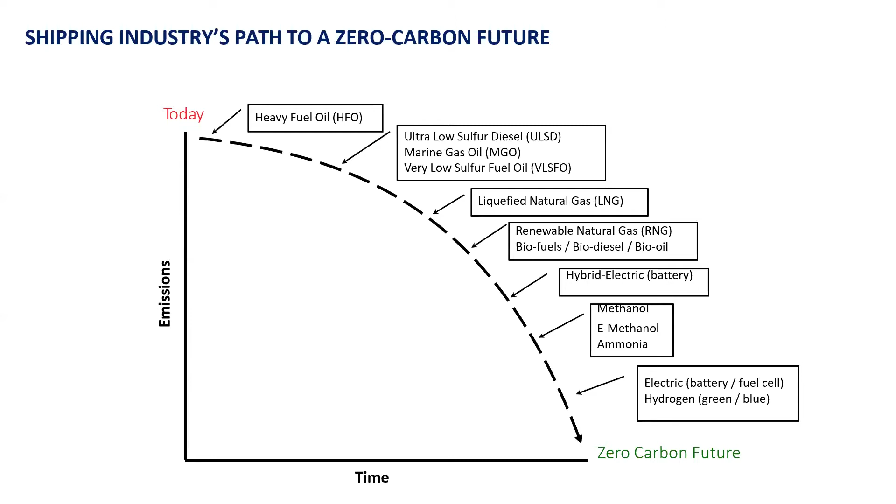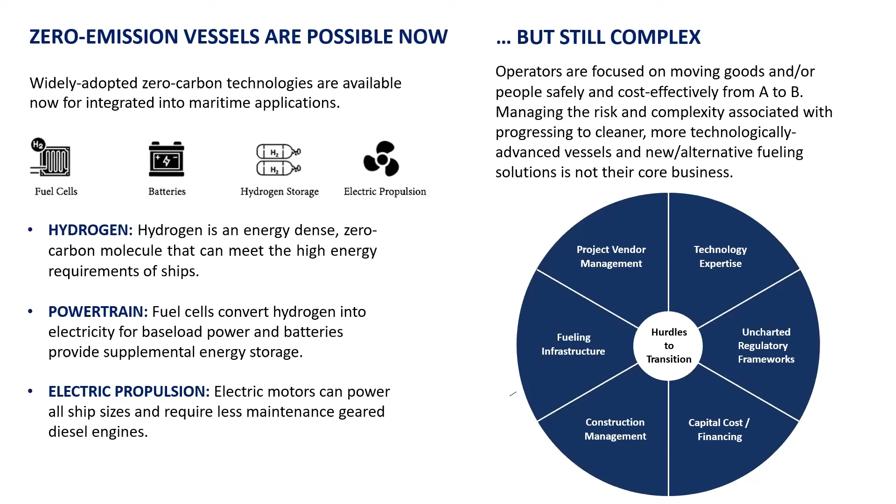So one of the big points that I want to drive home today is that zero emissions vessels are possible now. The technology does exist. What we're doing is integrating these available and widely distributed zero carbon technologies into maritime applications. So the Sea Change, which is the ferry that I'll introduce in a second, is just a first-of-its-kind application of this zero carbon technology. And so while the technology does exist, the challenge that we face is that there is a fair amount of complexity and risk associated right now with making that transition. And Switch's objective is to help the industry by making that transition easier and shouldering some of that complexity. Next slide, please.

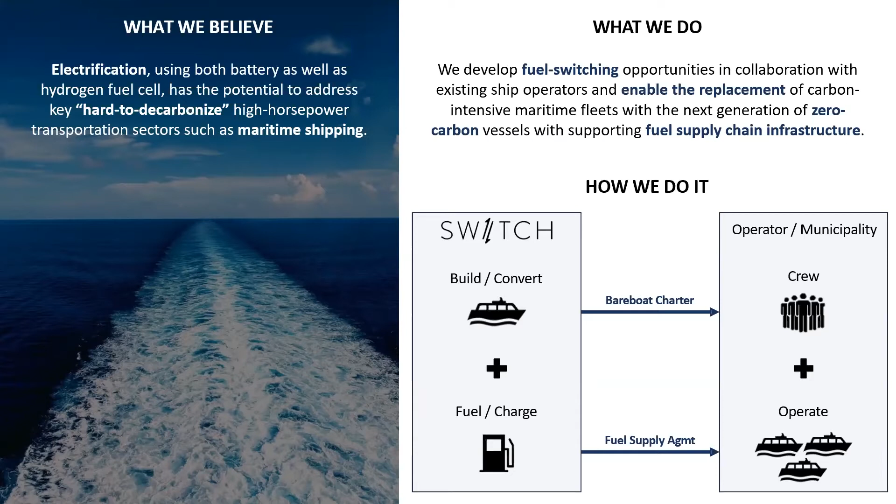So we believe electrification using both battery as well as fuel cell has potential to address the hard to decarbonize high horsepower sectors such as maritime shipping. And really what Switch is looking to do is both create the zero emissions vessels and then also support those with the clean supply infrastructure, and then make those assets, the zero carbon vessels, available to existing operators and municipalities in an efficient way. So that's through simple lease structures like a bareboat charter. Yeah, and with that, I'll go to the next slide. Next slide.

Great. As Madeline mentioned, the first that we are working on is the Sea Change, our vessel. It's a 70-foot passenger ferry powered by hydrogen fuel cell and battery. The Sea Change has 246 kilograms of hydrogen storage on board, 360 kilowatts of fuel cells, a 100 kilowatt hour lithium ion battery, and those electrons are sent to 300 kilowatt electric motors.

And so again, the architecture of the propulsion system in the Sea Change really isn't all that different from some of the predecessors that were hybrids, such as on the West Coast and then smaller vessels on the East Coast. What we're doing is taking out the diesel generators, replacing those with fuel cells. We have our zero carbon architecture. Next slide, please.

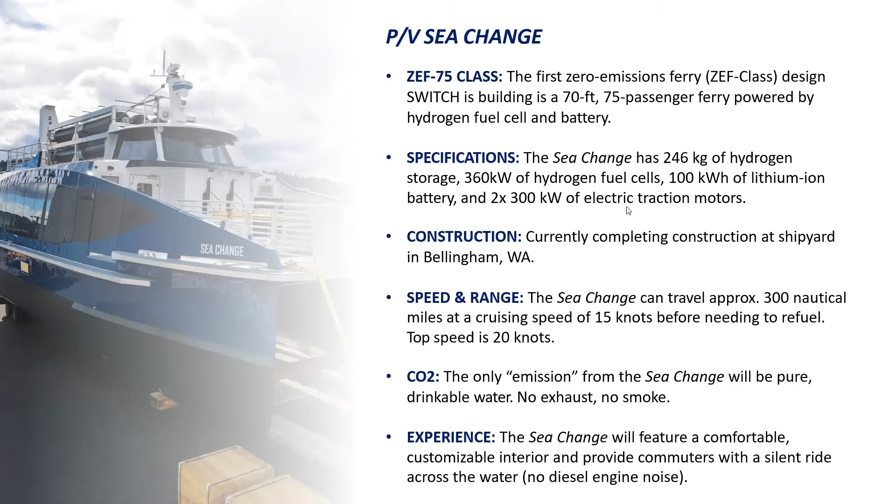Great. So also, these are some pictures. We launched the Sea Change on August 12th, which was a very exciting milestone for us. It's underway for now, and we're getting to the final stages and are at the finish line to be up in San Francisco. This is just a picture of the vessel on the water. Next, please. Great. A bit of the construction timeline here of the Sea Change. Go to the next slide.

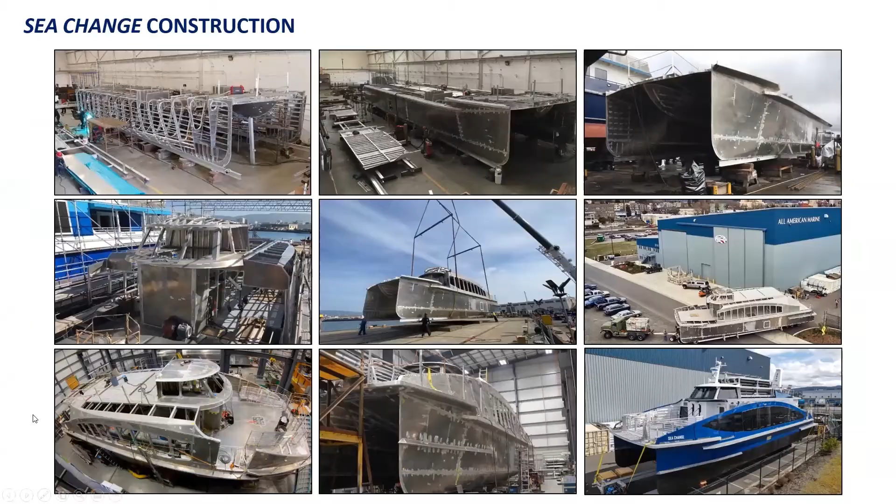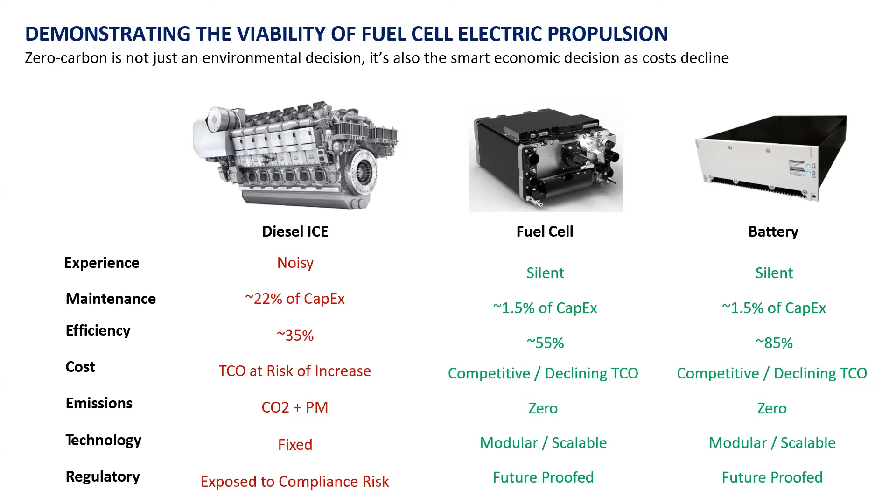This just real briefly shows Switch's position that zero carbon is not just an environmental decision, but it's also an economic one. And as you heard in the beginning, there are regulations coming down the road soon that make these future-proof solutions something that is, first of all, required, and minimizes or completely eliminates exposure to compliance risk. So we see that as one of the big drivers. From a pure technology standpoint, these technologies are in many ways more attractive than your conventional internal combustion engines. Next slide, please.

Great, and then I'll just run real quick through the hydrogen fuel supply chain. You can't have an electric car without an electric charging station, and nor can you have a clean fueled vessel without the supporting infrastructure to fuel that vessel. And so Switch is working with a partner company of ours, West Coast Clean Fuels, that will manage the fuel delivery for sea trials up in Bellingham and then also down in the San Francisco Bay Area.

And West Coast Clean Fuels will manage the permitting with the US Coast Guard, the fire department, the city, and all local municipal entities that are required in that permitting to develop the fuel supply chain. And so this is leveraging experience that West Coast Clean Fuels has in the LNG space. Currently, West Coast Clean Fuels is also managing the US Coast Guard process and developing the fuel supply chain for Pasha Hawaii's container ships that are going to be fueling out of the port of LA Long Beach, and they will be the first LNG fueled container ships on the West Coast. Next slide.

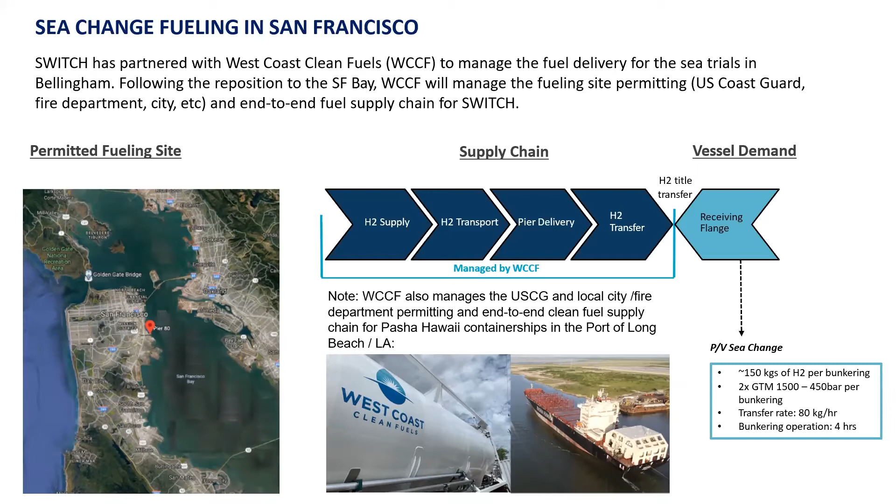Great, and then this just shows a bit of the detail on how the Sea Change will be fueled. It's going to be a cascade fill going from compressed hydrogen in the trucks over to the compressed hydrogen tanks on our ferry.

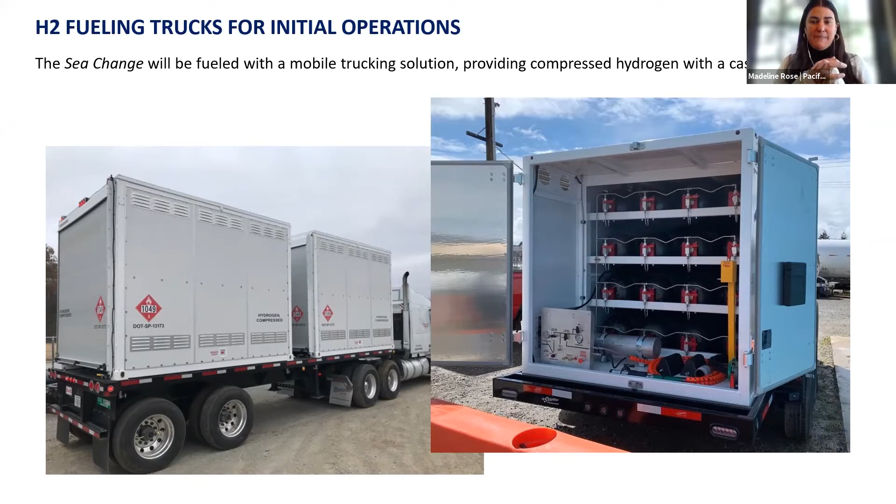So keeping us on the theme of ferries, our next speaker is going to be Graham Balk, the managing broker from Green Yachts. Graham has been working at the intersection of business, boating, and environment throughout his entire career, and that's part of the reason why he helped start Green Yachts. As the managing broker at Green Yachts, he oversees recreational and commercial sales, business operations, strategic partnerships, and boat builder relationships. And Green Yachts has signed agreements with over a quarter of the short-run California passenger ferries that are going to be required to go electric this decade. So it's certainly right on the front line of figuring out this propulsion system for many additional passenger ferries in California. So Graham, thank you for being here, and over to you.

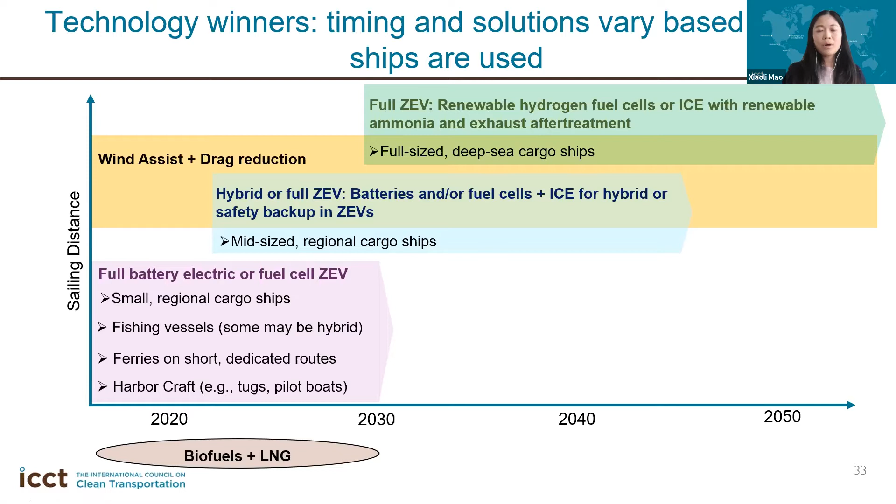So we all know that the battery, compared with the fossil-based fuels, has very, very low energy density. So that makes the reduced range of using batteries a huge challenge for longer range applications. But how limited? We actually used the real world ship operations data in 2019 to model a set of theoretical ranges for different ship types using the battery electric technology.

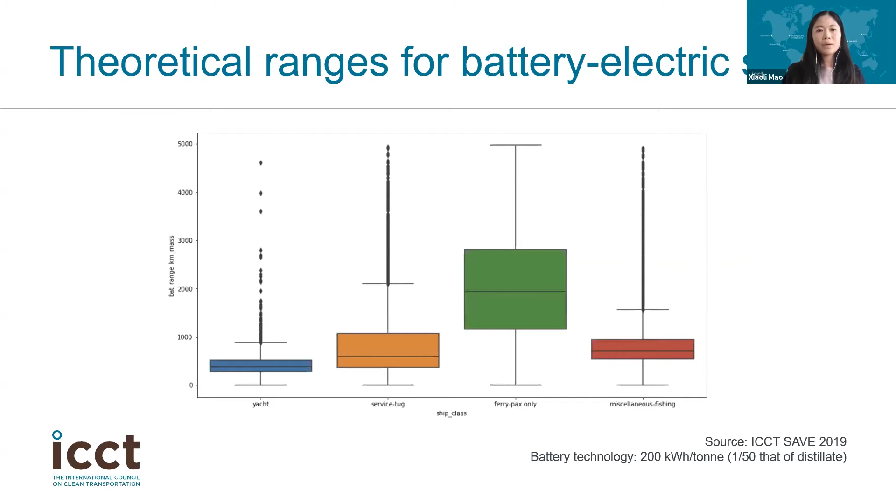Next slide, please. So recently we have been doing some studies focusing primarily on the larger fishing fleet that are active in the Dutch Harbor region, because we know it's a very active fishing port. We analyzed the feasibility of using battery electric technologies to repower these ships. And we found that the attainment rate, which is defined as the share of voyages that these ships can make using battery electric technologies compared with the total number of voyages that they're supposed to make, the overall attainment rate is actually promising from our point of view.

These vessels are relatively large. They engage in relatively longer average trip lengths. And although the trawler subsegment among these vessels shows a relatively lower attainment rate, which is due to huge energy consumption during their active fishing activities, the overall attainment rate is actually not too bad. I should mention that these are also using the relatively conservative battery technology assumptions.

And we also actually modeled the feasibility of using hydrogen fuel cells on these very same ships, and it's showing across the board a very high attainment rate, which is, I believe, over 95%. Next slide, please.

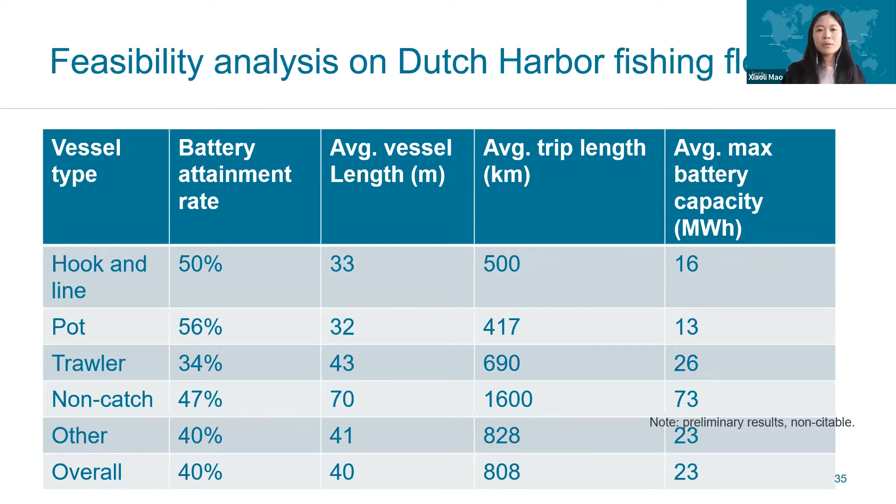We found that the trip length, which is how long the ship has to go out on a single trip between refueling, between the berths at the port, is the determinant factor for attainability. So shorter trip lengths for relatively larger vessels are more able to attain using this technology than the others. Next slide, please.

We also identified some ways to improve the attainment rate. In the short term, you can definitely implement some energy saving practices, including speed reduction. And there is growing interest in utilizing diesel battery hybrid solutions, which are shown to be fuel saving, if not considering other benefits. In the longer term, though, we can rely on battery technology improvement for sure. And the other hybrid option, battery hydrogen, is actually looking more promising.

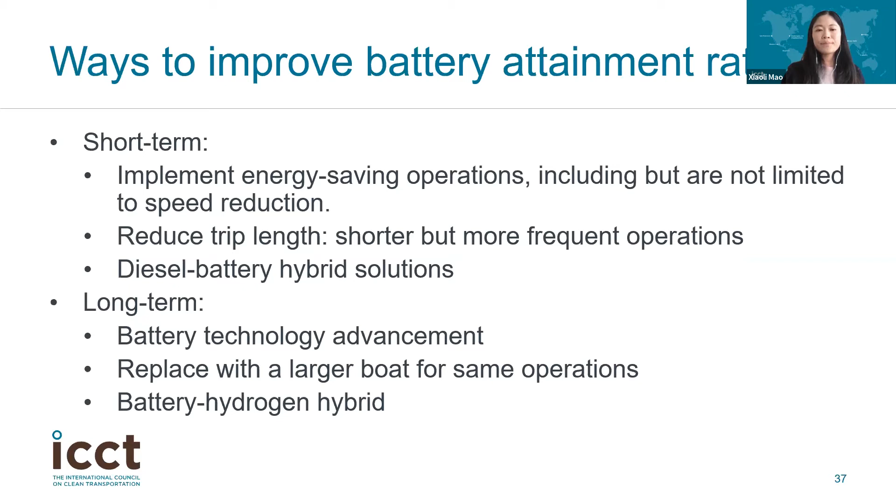Next slide, please. I'd like to point you to some other research that is on this same topic and arriving at similar conclusions as ours. But I'd like to point you specifically to a Maine state lobster fleet decarbonization study, which looks exactly at the feasibility of hydrogen fuel cells and battery technologies in particular. And this study is going to be out very soon, so I would encourage all of you to follow that. Next slide, please.

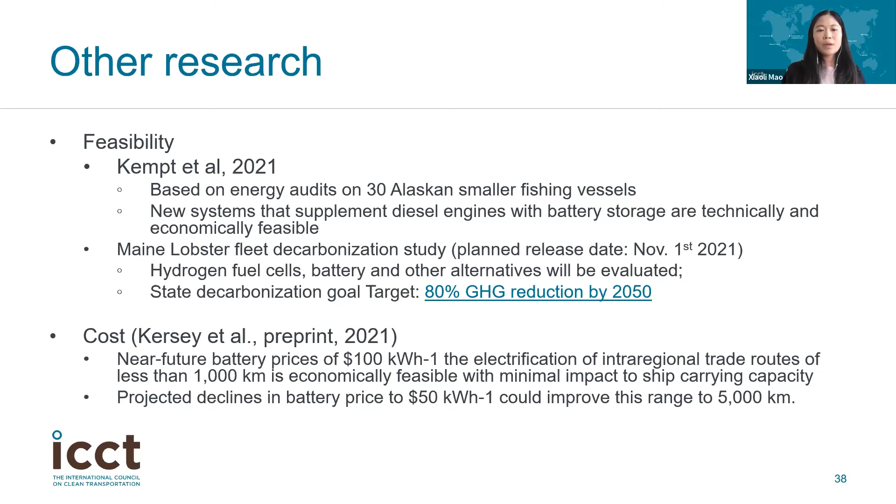There are some issues to consider, though, beyond the technical feasibility or the benefit of saving the environment. The benefits of using battery electric technology include no charging time constraints as compared with the ferry segment, which was mentioned previously. And there's this added benefit of reduced noise and vibration while you're actively fishing. So that's a huge benefit.

There are also many other issues to consider that are concerning for the battery applications. One of the issues that I found is that a comprehensive energy audit for fishing vessels is very lacking. When we talk to fishermen, one of the common comments is that even individually different vessels have vastly different energy consumption profiles. So without a comprehensive energy audit on all those vessels, it's very difficult for policymakers to get a full picture of how the industry is doing and how to implement different strategies to make it better. I won't go through all the list, though.

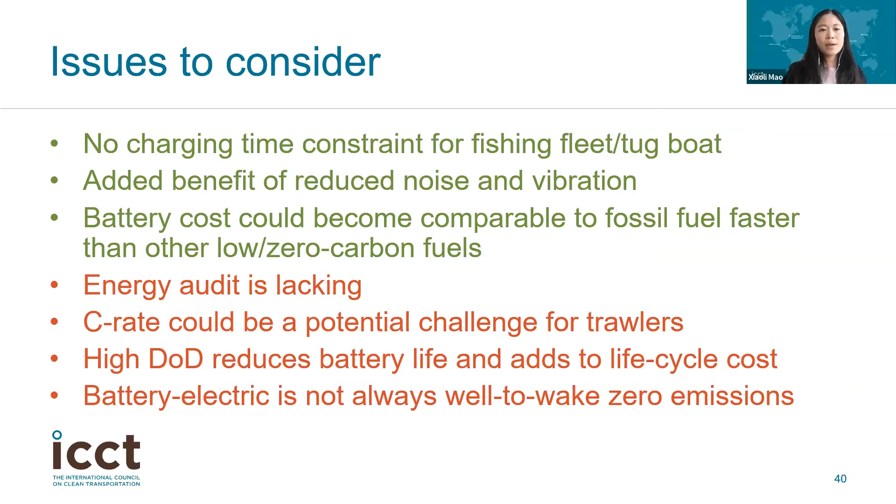Next slide, please. I would like to end with some key takeaways. I think that current battery technology can be used in the current fishing fleet to not only save fuel cost, but reduce emissions at the same time. Battery technology will continue to advance and the cost will almost definitely continue to drop. And the electricity that these batteries use will get cleaner over time, delivering more climate benefits. Batteries play different roles in different fishing subsegments, so I'm not claiming it's the right solution for everybody, but a full electric or hybrid solution could be considered for your own application scenarios.

And finally, comprehensive energy audits are very needed, not only to help the policymakers, but to help the fishermen themselves understand how they are currently doing and how they can implement different ways to save fuel cost while being responsible to their local environment.

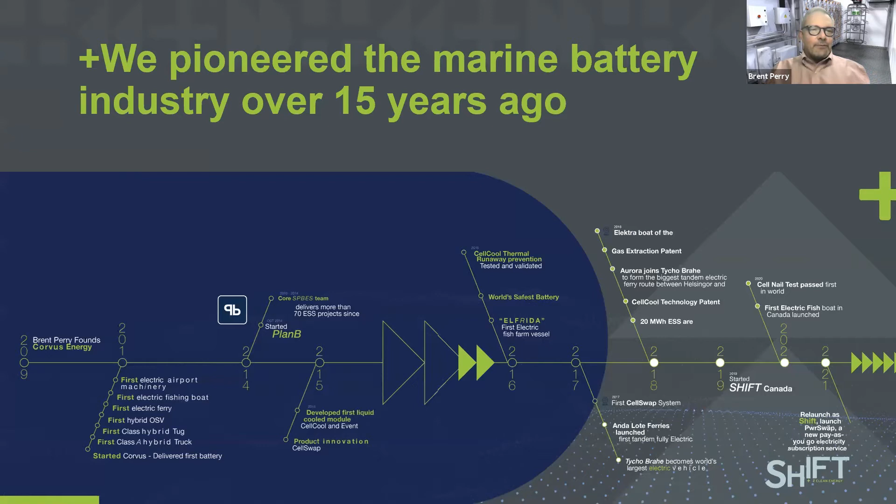So we started into this space learning how to actually apply the technology of lithium into energy storage and really into marine. And that was initially the fundamental thing.

Can you guys go to the next slide, please?

That was really the fundamental question of how do you address the needs of the maritime industry? And the needs of the maritime industry are fundamentally different than almost any other industry that uses energy storage. The marine applications need to have the 24/7, 365 reliability that is a part of our ability to turn propellers and make money. The second element they have is risk management.

There really is no room for failure when you're talking about propulsion power. And then the third simply is you have to be able to deliver, commercially speaking. If we don't make money, then we don't really engage in any technology. So with all those challenges in mind, we spent quite a few years really looking at the cell industry and trying to decide whose lithium cells would deliver those kind of value propositions and share those kind of purpose goals with us.

So when I started doing fixed battery installations back in 2011, the question was what markets, what verticals do those make sense in? And the initial markets were tugboats and ferries, and really ferries took ownership of that space. And even though we've installed everything from oil and gas platforms to different types of surface and subsea vessels, to ferries, to even now we're doing short sea and long sea vessels, the reality was the fixed installations

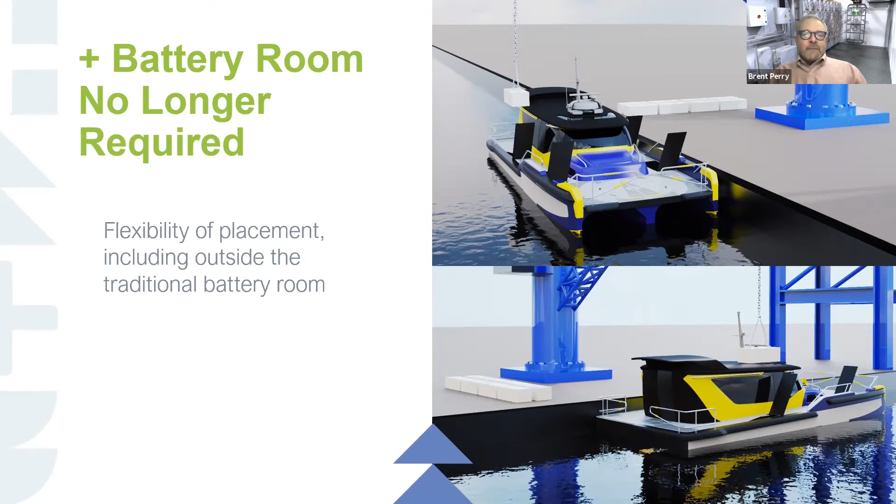They do have the opportunity now to capture, gain, and be credited for the emissions that we're no longer producing into this space. And effectively, they have a lot more latitude of operation in terms of how they actually manage this performance. So if we can just go to the next slide, please.

They want to hear what is there, what is available today. How do we get to carbon-free shipping in 2050? And I love this slide. I guess Elias and I talk too much because we have very similar slides, but I just want to show where we're at today, where this harbor craft industry is. I cover harbor craft for North and South America currently. It envelops the workboat world, the ferry world, the fishing world, all those combined.

And you can see that today, of course, we're in the diesel, electric, methanol, LNG kind of space in most workboats. Advancing forward, battery systems are definitely coming online in a heavy way, and on the ferry side, battery is kind of a choice currently. I wish most workboat segments went from point A to point B, where you can calculate fairly easily how much power is required, but a lot of these harbor craft, you don't know where they're going to be from one day to the next. So with the technology that Elias talked about a minute ago, fuel cells are definitely the next step in that transition.

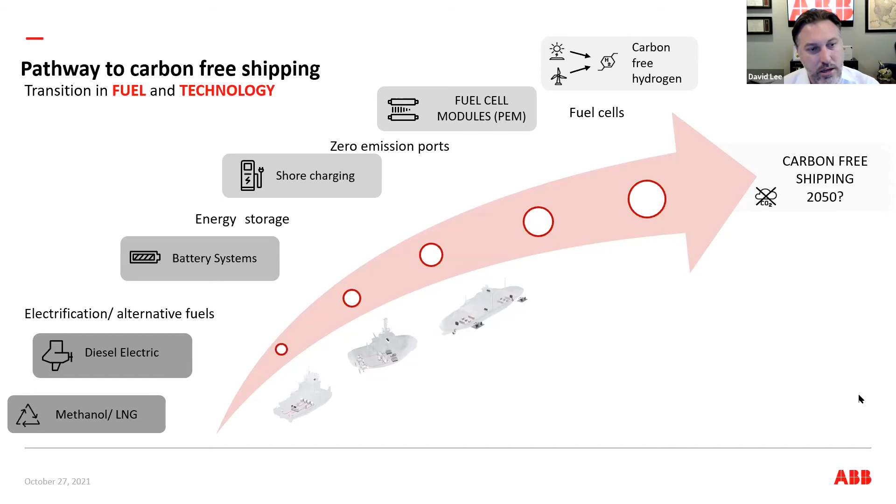And then we get into the space of where the world is going on the next fuel. At ABB, we truly feel that carbon-free hydrogen is going to be the next step. It could be ammonia, it could be something else, but that's where we start seeing industries come to a mesh point. The best way to get carbon-free hydrogen on a large scale, of course, is the offshore wind market that we're involved in as well, and that's coming to the US in a heavy way currently. So we really think this is the path to get us there, and this is currently where each one of those markets are. So if you go to the next slide, please.